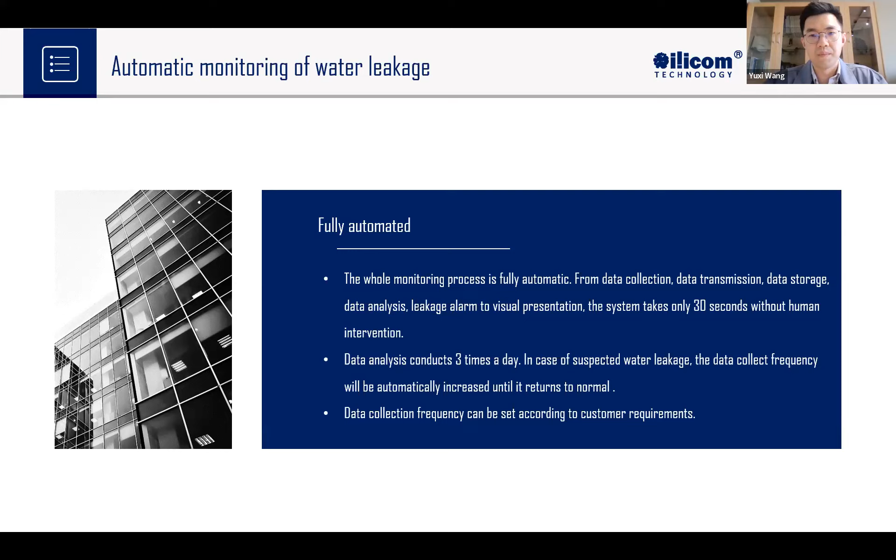The data collection frequency can also be adjusted by the customer. If the customer thinks there are too many alarms on the mobile phone, they can switch to a lower frequency for data collection.

The most important feature of the TAN logger system is AI. It basically implements artificial intelligence technology in leak monitoring. So far there are lots of remote loggers from other brands, but as far as I know, there are probably less than 3 companies able to apply AI algorithms into their logging system. The TAN logger system is one of them.

The AI prediction algorithm is based on 30 million leak data points, and this number keeps increasing every day because the loggers not only hear leaks and send alarms, but also record the sound data. Once they record the sound data, they keep it in a data library. So 30 million is only the basic number of our data - it's getting higher every day. The more loggers we deploy, the more data we receive from the system.

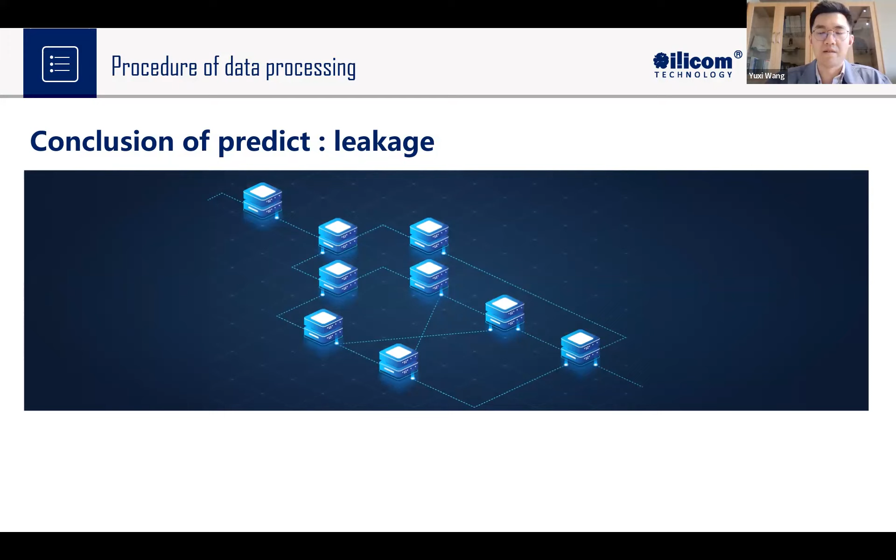So it's either no sound or a normal situation, or a sound that is not generated by the leak, or it's a leak.

And to this, the next step we are going to discuss is the logger itself. So the entire logger, which I will show you later from the PowerPoint, has a very simple design. It's like an all-in-one design.

There's no switch. There's no external antenna. There's no accessories outside of the logger. It's just a simple thing. It's easy to install.

Anyone can do it and it can be done in 1 minute. So you just literally put the logger on a pipe or any metal accessories from the pipe,

and that's it. And also we have the app for smartphone to do all the recording, the data transmission and things like that. And the users will see what's going on from the app on their smartphone.

So as I said earlier in the PowerPoint, NB-IoT will provide the most reliability for the data transmission compared to 4G or other types of communication technology.

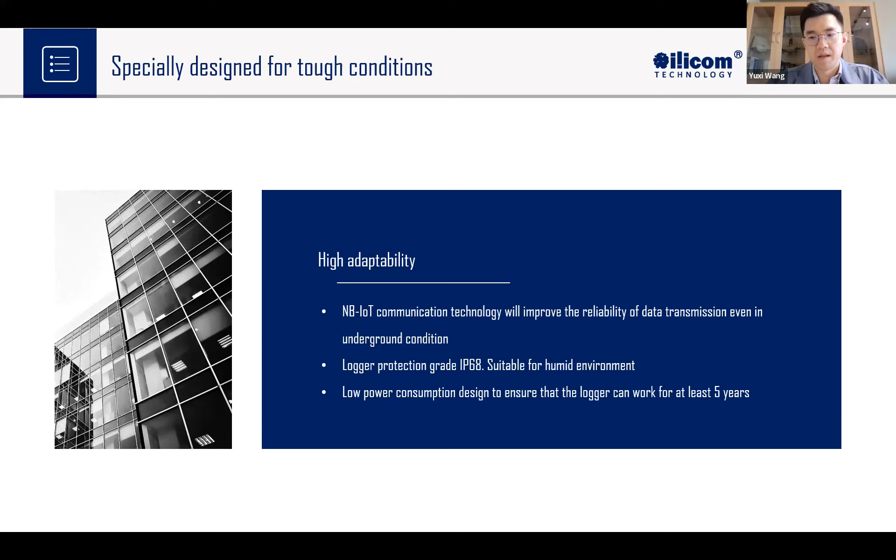So once you deploy it, you just leave it there and keep monitoring every day and let the loggers do their own work.

Right, and the third part is the typical workflow. And I don't really want to talk too much on this part because it's actually the same workflow as every other logger does.

So for deployment, we install the logger on the pipe, and it will automatically turn on. And we suggest that the loggers be deployed with an interval of no longer than 250 meters.

And it actually depends on pipe materials too. If you've got PVC or PE pipe, like those plastic pipes, you probably have to make it even shorter, maybe shorter than 50 meters or 30 meters, due to the sound propagation being very, very short on those plastic pipes.

And once you deploy it and it's all turned on, that's it. Then you open the GIS platform and open the app, and they will automatically start recording the sound data.

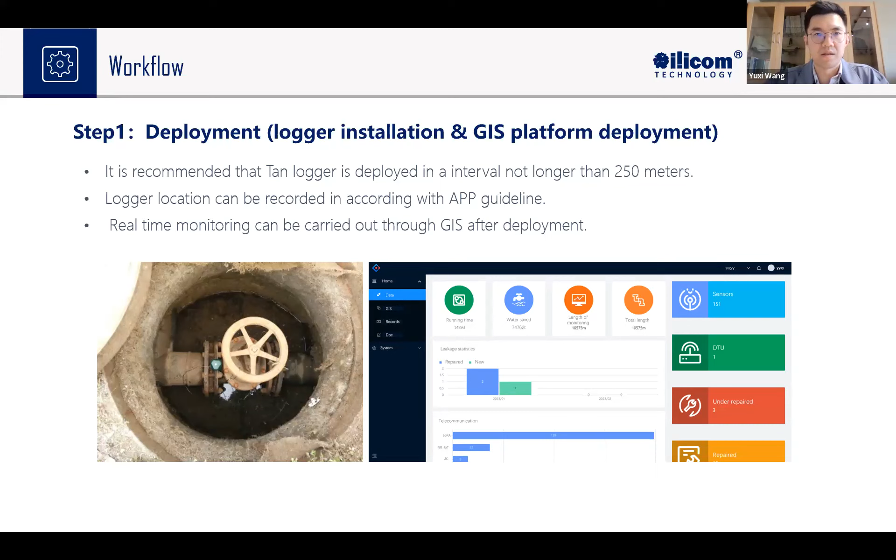So if the loggers find something suspicious from the pipeline, they will give you an alarm, and you will see an alarm message from your mobile phone,

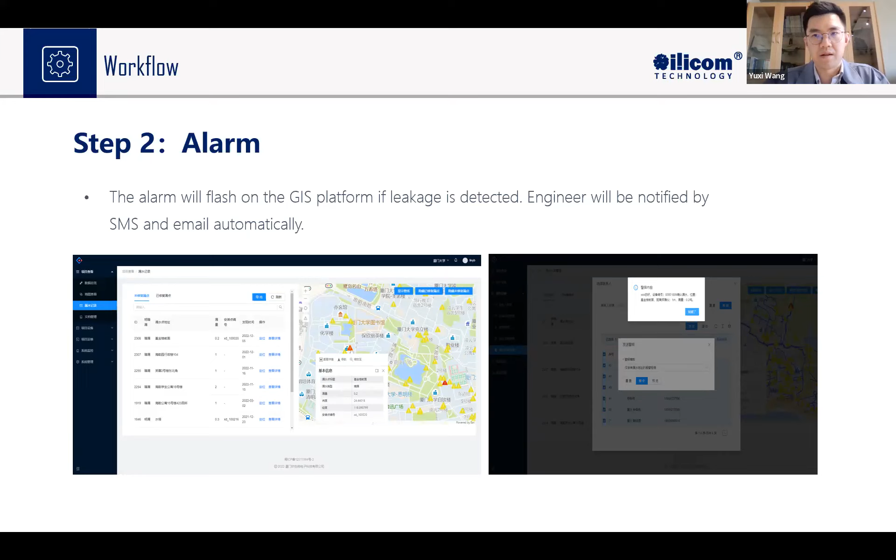and the engineer will go there and check. Okay, this is the area where we found the alarm.

And you can see from the interface, we have alarm from a building, and we also have the type of the leak. It's a small leak or underground leak, or it's a leak from the manhole or something like that. And also we have the approximate leak rate from this place.

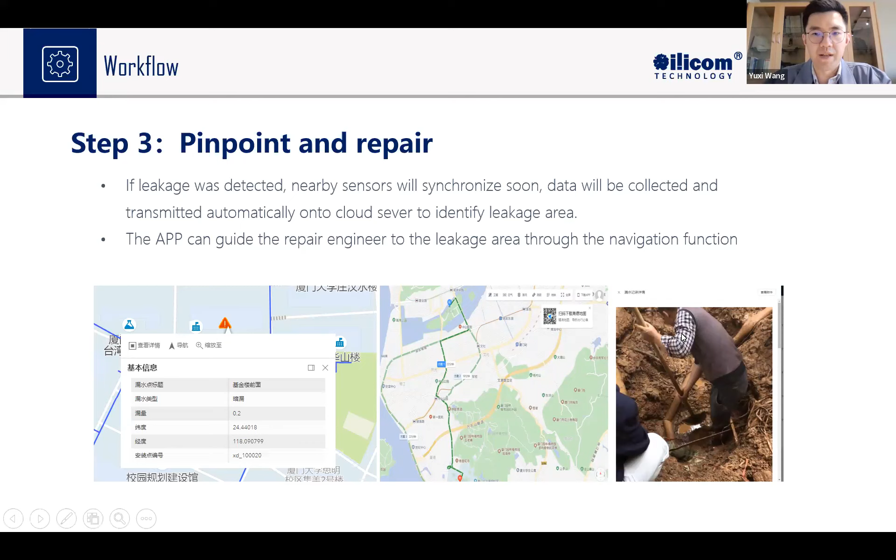And also the other information from the loggers. Then when the engineer or the leak detection crew receive this message, they will send people there and start doing the normal workflow of the leak detection, the pinpointing workflow. And then finally we'll find the leak from this area, and then job done.

And then the next step, alarm off, and we will receive all the data from here and let the system just continuously monitor. So that's the 4-step workflow, it's quite simple. It's all automatic. So all you need to do is just keep looking at the screen and don't miss the alarm message from the mobile phone.

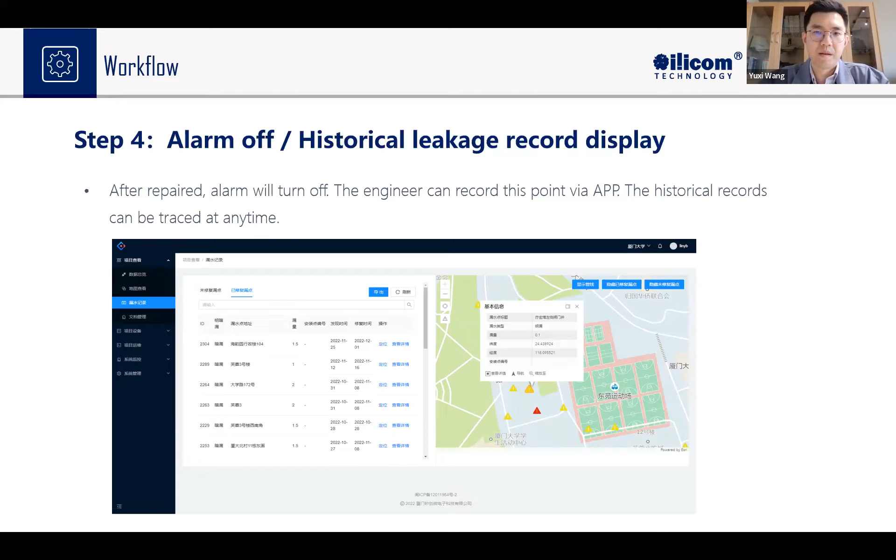And as I said in the previous PowerPoint, it's all-in-one design, and the temperature range for this small logger is from -10 to 60 Celsius degrees, and the battery life is over 5 years.

And we have already made the English platform. It's not only in Chinese, we also consider the customers from the Western world. We already have the GIS platform all in English. All the interfaces are translated into English.

So from the platform, you will see a map. You have the historical record, and also all the loggers you see from the map, and the status from each logger, if it works normal or there's an alarm on the loggers.

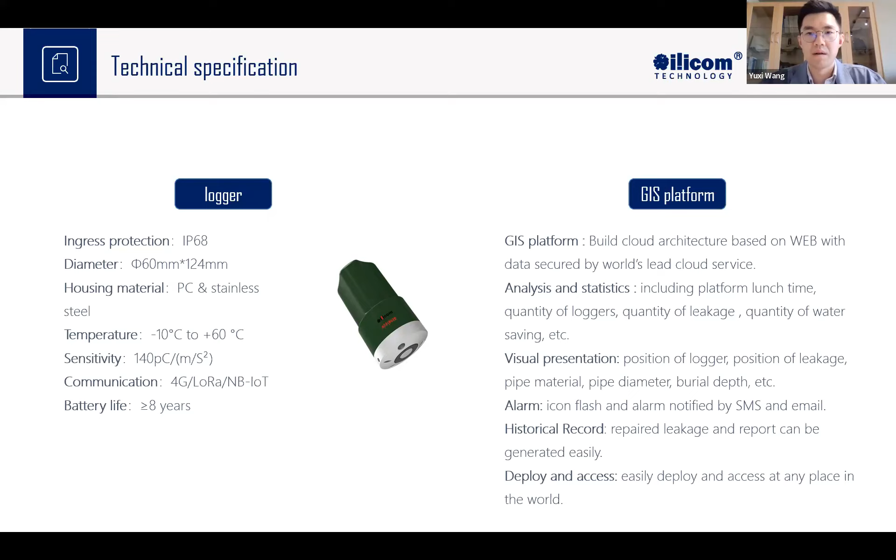So next, we will talk about 3 case studies for this IoT logger. Case study 1, I'm going to do it from 2021 to last year. The case study 1 is one water utility from Tsingtao.

It's called the Chengyang Waterworks. It's quite a big company, they are controlling 6 water plants, and the water supply is about 187,000 cubic meters, and they have 620 kilometers of water supply network, 26 kilometers of water mains, and 596 kilometers of water service pipes.

And their NRW is very high, it's about 30%. Maybe some guys know that we just released new regulations in China about the urban water leak rate, which has to be controlled within 9% by the year 2025. So obviously this company is far away from the standard.

And we calculated the economic loss from the water leakage is about 45 million RMB per year. So it's quite a water loss to this company.

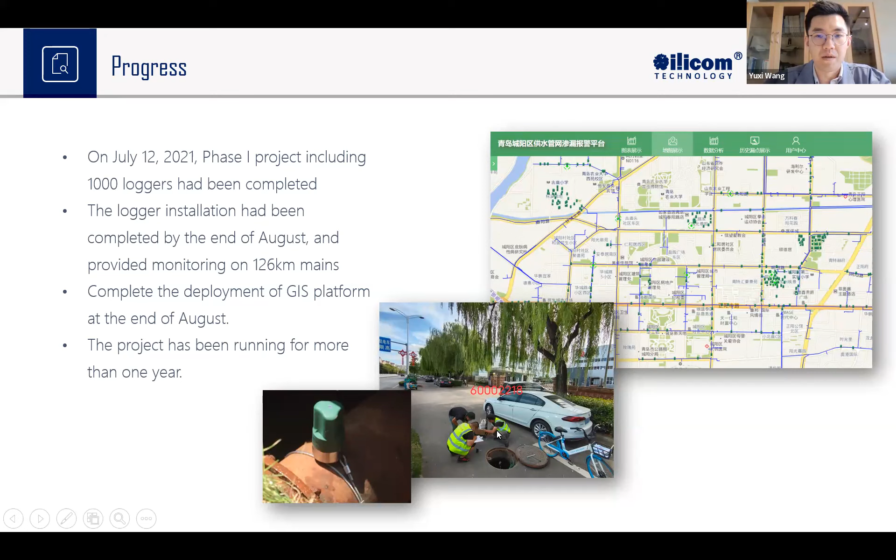And the project has been running for more than a year, and so far it's still running. You can see from the platform we have all these green dots, the loggers we have, monitored in the buildings and on the pipes and water mains. You can see the loggers on the pipeline, and people trying to set up the transmission and such.

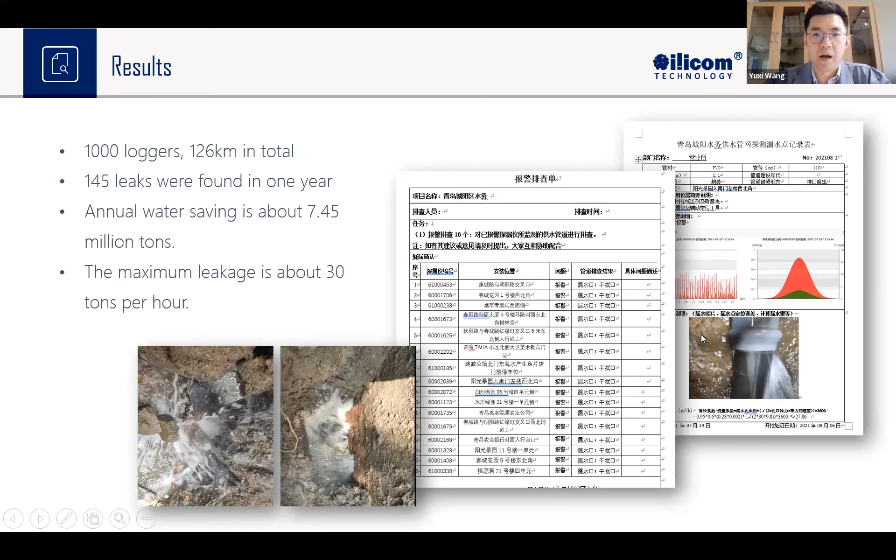So the result was quite obvious. We found 145 leaks in 1 year, and we saved about 7.45 million tons of water for the company. The maximum leakage we calculated was about 30 tons per hour, so it was quite a big leak. And also we have the report from the company to calculate the leak rate, and also how it was generated.

So for case study 2, not only did we deploy the loggers in China mainland, we also tried one case in Hong Kong Water Supply Department. We had 167 test points deployed in 7 different areas in Hong Kong, including commercial, industrial, and residential areas. For this case, we also tried different pipe materials - not only metal pipes, but also PE pipes, with diameters ranging from DN50 to DN700.

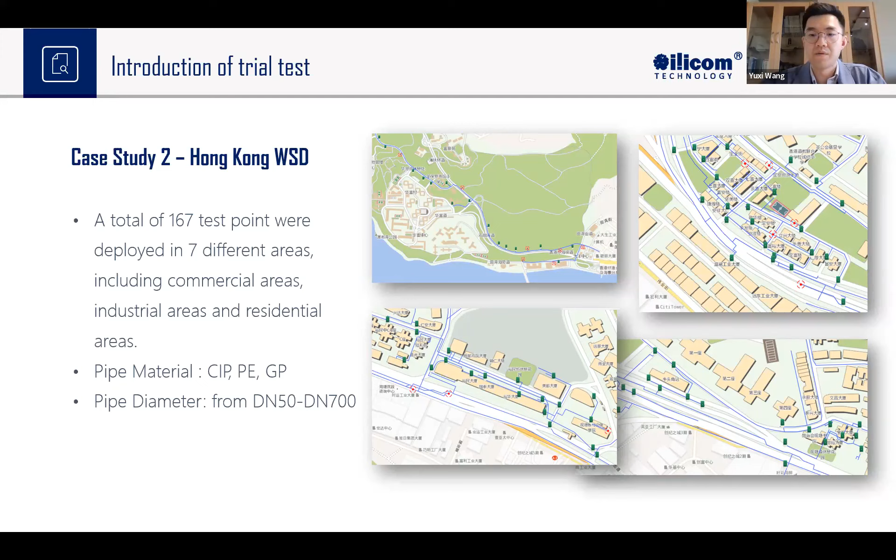The test project gave us 23 alarms, and we tested the data transmission rate at about 98.7% for the NB-IoT. We found 3 leaks, not as many as we found in the Tsingtao case. So for Hong Kong, we think the logger is okay for several pipe materials, including cast iron, PE, and galvanized pipe, from DN50 to DN700 - the loggers are able to detect sound from those pipe ranges. Overall, we think NB-IoT is applicable in Hong Kong, and if it works in Hong Kong, it should work in other areas - in European countries, America, South America, and other countries.

For our latest project last year in Huainan Waterworks, we deployed 250 loggers in 5 days with 4 engineers - again, a quite quick deployment for this project. We monitored 21.4 kilometers of the water mains.

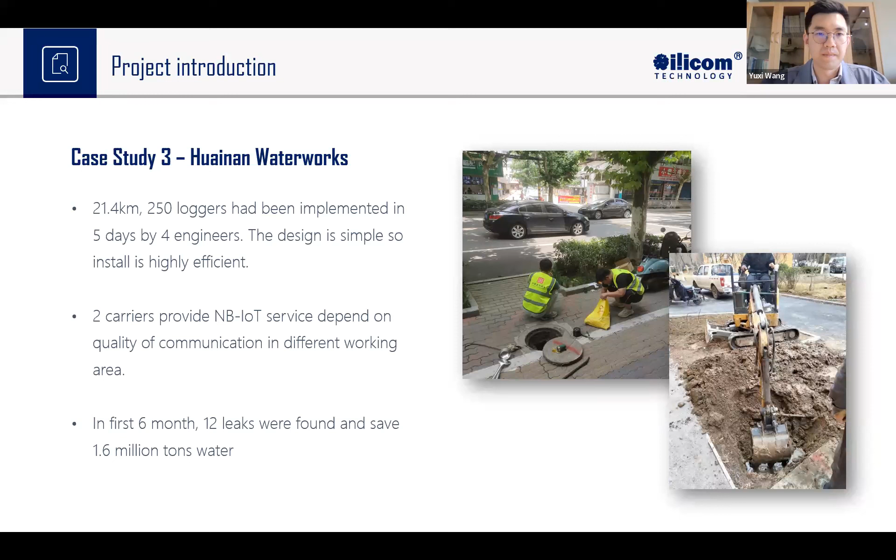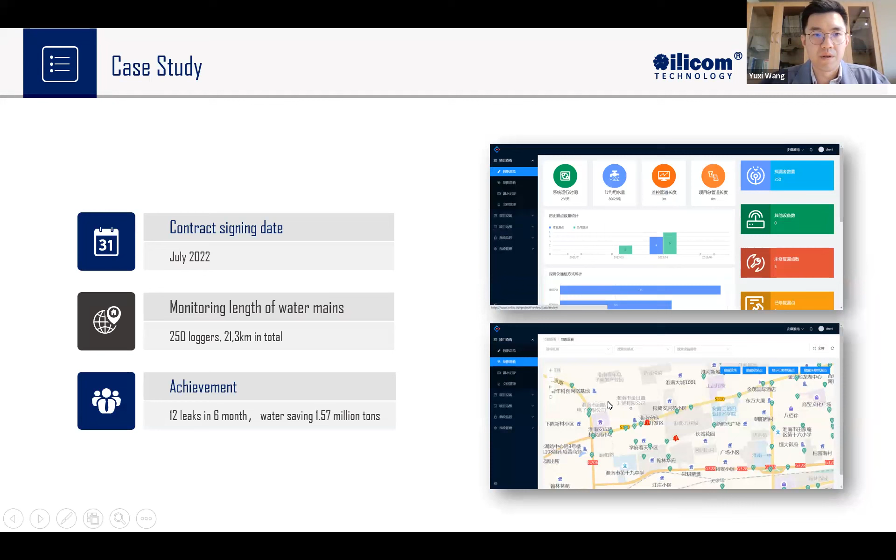Here are the results from the platform, and you can see the green dots again - those are the loggers.

That's a very short presentation, but the whole point I'd like to make is that in China, we're still trying to develop our own NB-IoT logging system. As you know, China is moving at quite a fast speed on Internet of Things and data transmission. So if any of you are interested in trying a trial of this system, we are happy to provide that.